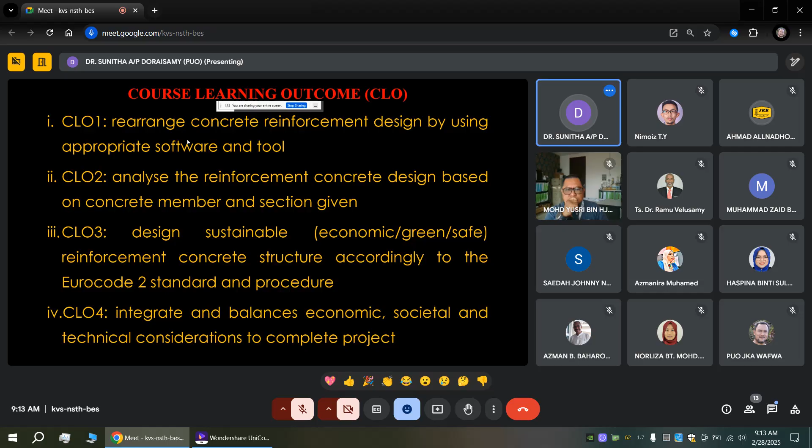So me being attached with JKR allowed me to use a certain software to learn to do the design of reinforced concrete buildings. So that marked my CLO1 actually.

So the importance of internship: it allows you to apply what is learned in a practical setting, helps prepare an individual for tasks they may complete once they have begun their career, leads to testing industrial knowledge, helps a person develop transferable skills, learn about new interests, and allows someone to network with both new and experienced professionals within their industry, allowing an individual to learn in a safe environment.

Overall, the internship allowed me to learn more about my strengths and weaknesses in this particular area. Even if I were to make a mistake or misunderstand a certain design process, this internship created a learning opportunity for me.

As I mentioned, I was not exposed to any software in design of reinforced concrete. So when I was attached to JKR, the first thing I was assigned to was designing a school project, and I was introduced to one of the software, Tekla Structural Design, which is famously used everywhere.

During my internship in JKR, I was attached to a school project. I was attached to the civil and structural design unit. The function of this unit in this project is looking into the design process of this building, a school building, by assigning the appropriate sizes for beams, columns, and slabs with consideration of proper specifications such as concrete class, concrete cover, exposure class, nominal cover, and so on as to Eurocode 2.

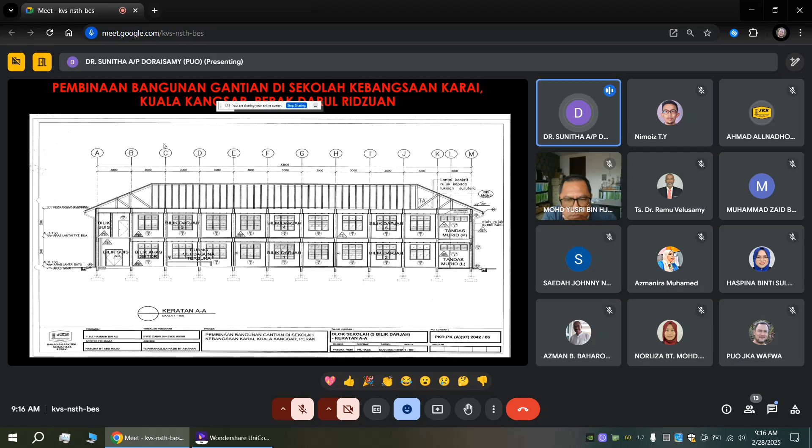These were the plans that were given to me in the unit to be referred to for the designing process using this software. This is actually a double-story, two-story school building located in Karai, Kuala Kangsar.

There's already an existing school there, and an additional 3 buildings were constructed to upgrade it. Among the 3 buildings I designed, one was the double-story, 2-story new school building. Apart from this, there was also a science lab, a single-story school science lab, and also a single-story preschool.

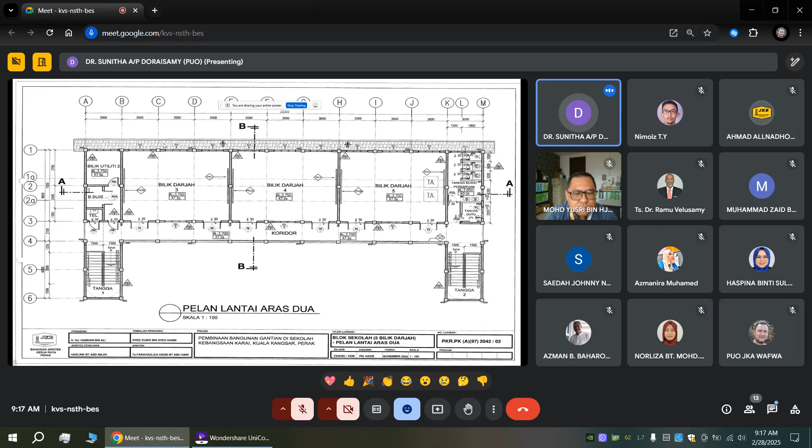These were the plans that I referred to. Now, the design process using Tekla software — this is how it looks.

Based on this selection, Tekla Structural Designer creates an initial setting set, also known as the active set, containing defaults for design codes, units and sections, and settings for drawings, schedules, and also reports.

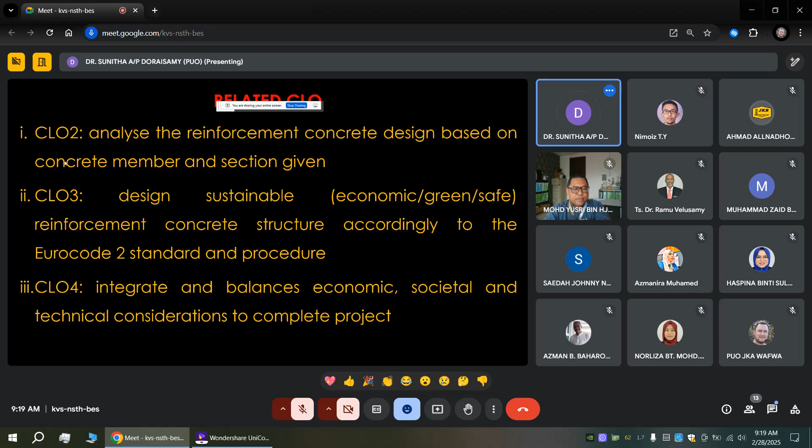As for the next three CLOs, it also contains the part of using the software and designing the whole building. But the next part of my training or attachment was once the design part was over — I was fully attached at Karai, Kuala Kangsar at the site to monitor and supervise the ongoing project.

This is the site of the project Pembinaan Bangunan Gantian di Sekolah Kebangsaan Karai, Kuala Kangsar. This I actually visited in 2023, and this is a picture from that visit.

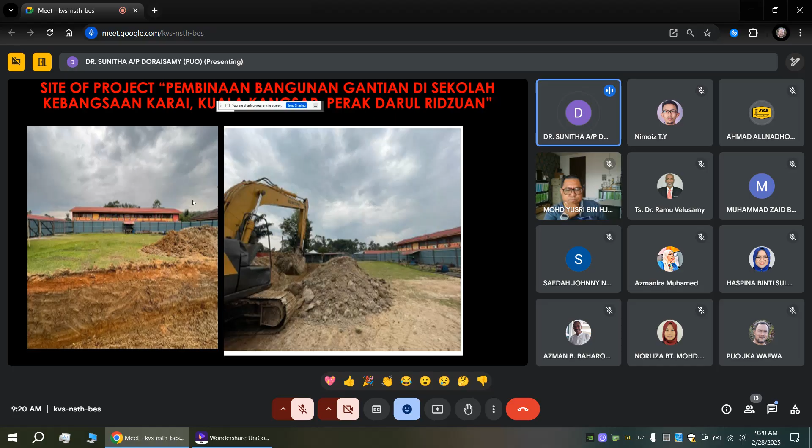I also had the opportunity to look at the site investigation process. I forgot to mention this was the excavation process. The excavation, what I saw, was towards the approved depth. It also involves a process of removing earth, rocks, and other materials in order to create a level and stable foundation for the structure. This is the process that I was able to witness, and this was the site investigation.

Mackintosh probe test and also the cube test. The Mackintosh probe test was conducted for the purpose of soil investigation, carried out to determine the bearing capacity, which is the strength of the soil. The result obtained from the test provides a rough estimation for the soil layer at a point.

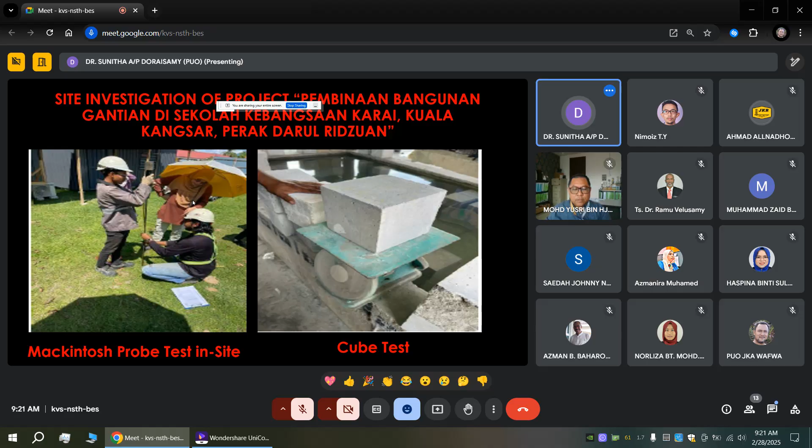The cube test was also conducted. The cube test is crucial in determining the strength of the concrete or whether or not it is suitable to be used at all. So it is important to be fully aware of the quality of the mixture for safety, financial and convenience reasons.

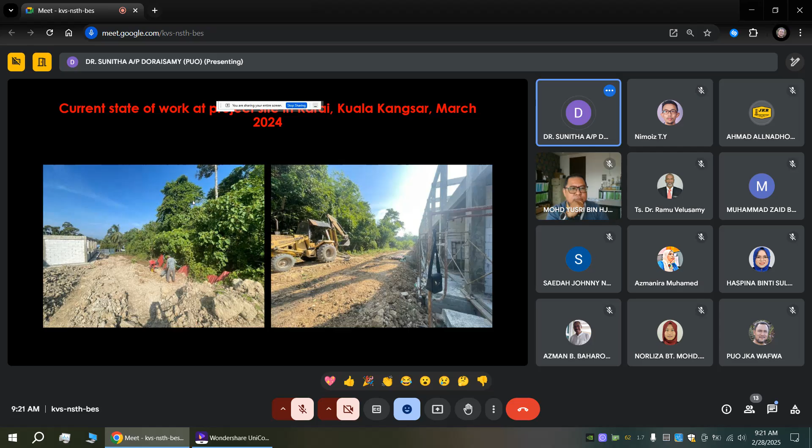Okay, this is the site as of March 2024 when I visited. The current state of the project. This is the work progress of the rubble pitching wall up to March 2024.

Usually in teaching, we call it the retaining wall. So the rubble pitching wall refers to a retaining wall. I did not previously have experience seeing the development of the rubble pitching wall. A retaining wall constructed using irregular shaped rough stones that are carefully placed and fitted together, often with mortar, to create a stable slope protection structure.

What I understood is the concept of rubble pitching wall is that rubble describes the rough, unshaped stones used in construction, and pitching refers to the placing of stones at an angle to create a sloping surface. The function is to resist the force of water and soil by providing a stable, resistant surface and slopes.

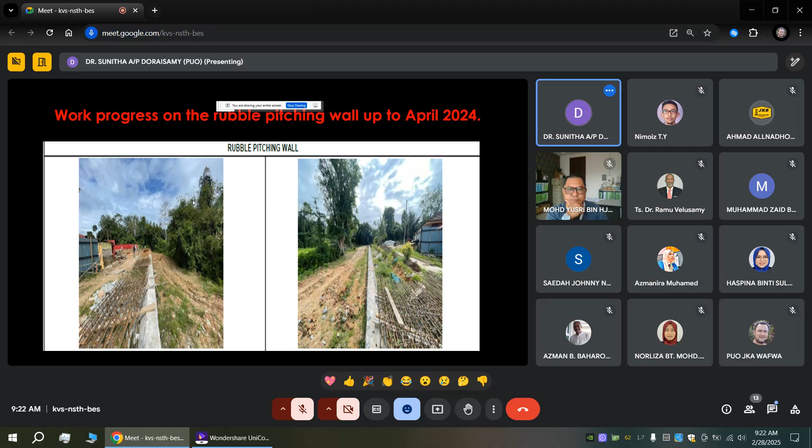Along with this, when I was attached there in Karai, Kuala Kangsar, starting from 2024, I was referred to JKR Kuala Kangsar at that time. So the building engineer of JKR Kuala Kangsar, along with contractors and supervisors, assigned me to look at the critical path method on the scheduling and monitoring of this project.

Critical path method is also something I teach students in civil engineering and construction engineering technology for the bachelor's degree program. I usually teach manual calculation. But here, in the industry, they are doing the critical path method, scheduling, monitoring, resource and financial evaluation using a software called Microsoft Project.

So once again, I was introduced to something new, the Microsoft Project software. I installed it and gained a lot of knowledge using it, which enhanced the real experience of monitoring and supervising a project along with this critical path method.

The critical path method helps in identifying the most critical tasks that determine the project timeline. Efficient resource allocation is essential for successful implementation of CPM. Monitoring progress and identifying delays early on are key aspects of using the CPM. Optimizing construction schedule involves making strategic time-cost trade-offs while adapting to changes in project scope, and risk management plays a crucial role in mitigating potential disruptions.

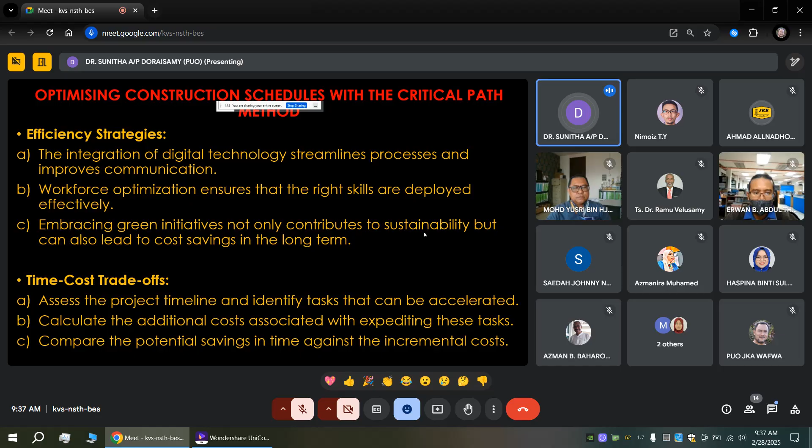So we make the decision on that, where we can invest more on the risky tasks to speed up the process of finishing the task.

So adapting to changes: reallocating resources to different tasks, rescheduling activities to accommodate new priorities, and negotiating with stakeholders for revised deadlines. So flexibility is about handling unforeseen events or modifications in project scope.

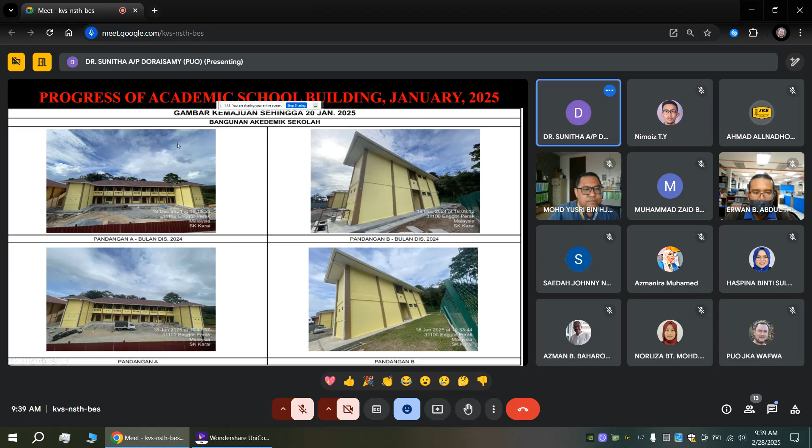So now up to January 2025, this is the progress of the academic school. This is the school that I designed using the Tekla software and monitored. Almost done.

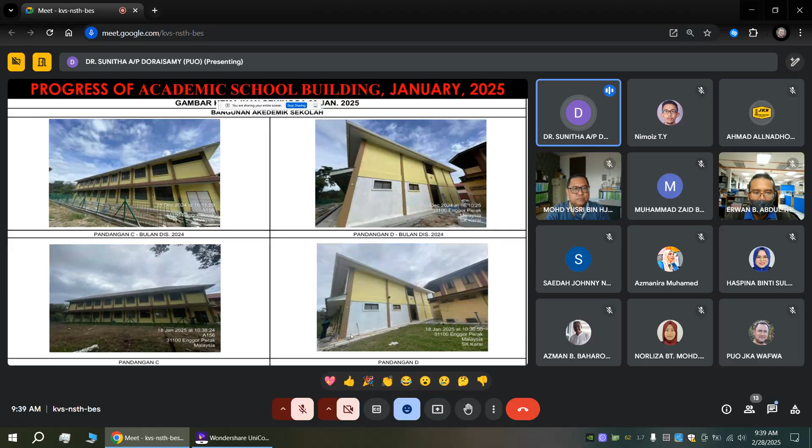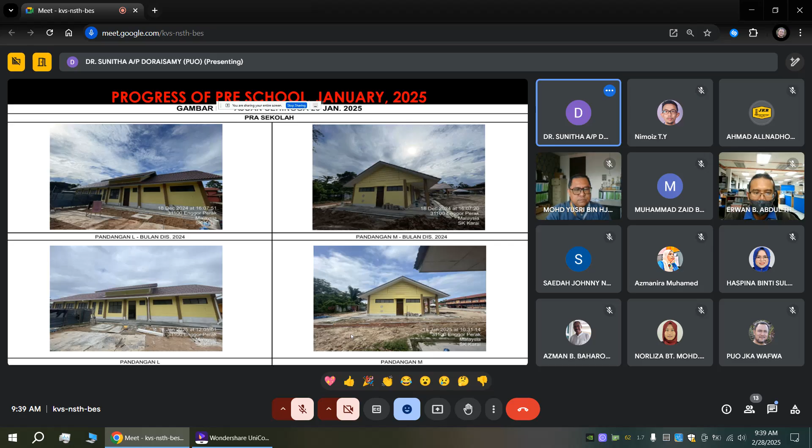So my conclusion here today is that the work experience I encountered during the internship allowed me to develop knowledge in certain skills. One of the skills was using software, integrating it in designing reinforced concrete structures. The designing, calculation and analysis part was done, and I also had the experience of management, planning and supervision.

So I put into practice the skills I learned and practiced during my academic time as well as my teaching experience at Ungku Omar Polytechnic. Things I have been teaching, I now had the chance to see on site, enhancing my skills and obtaining the perspective of a work environment, benefiting from a mentor or supervisor's experience and advice. I had guidance from JKR Perak, and also experience from JKR Kuala Kangsar as well as from the contractors involved in this project.

So that's all for my presentation. Thank you.